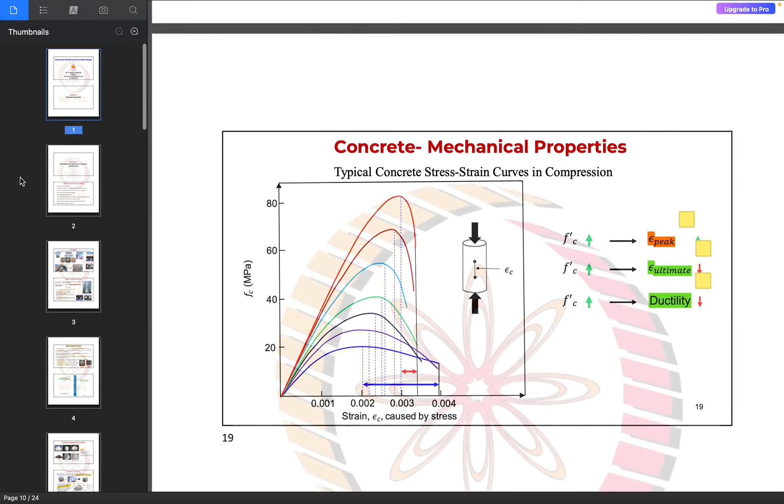So without further delay, let us start with the summary of the lecture. Whenever there is any doubt, please feel free to unmute yourself and discuss it with me. So we are starting with part 1 of the module. I hope that my screen is visible now.

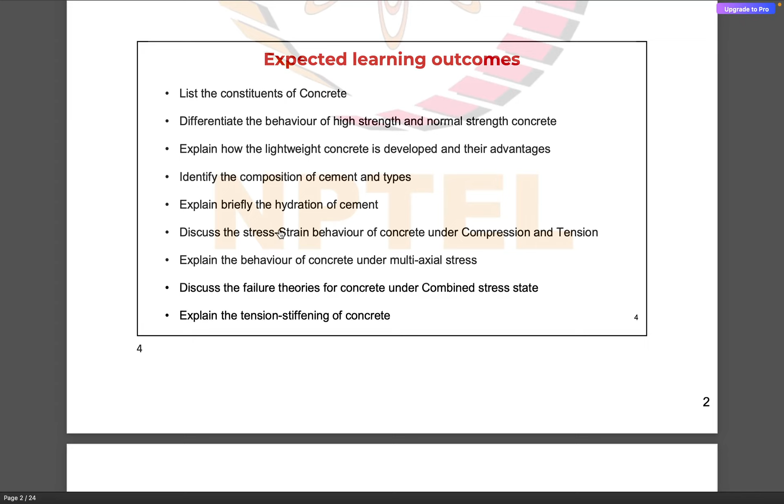Then we discussed the various failure theories for concrete under combined states of stress, and the concept of tension stiffening in concrete.

We'll start from the very basics, where concrete is made up of different constituents. We have the cement, which provides the binding properties. Then we have the aggregates, which provide the strength, and water, which also provides binding and is important for the workability of concrete. Then we have different types of admixtures which help enhance the properties of both fresh and hardened concrete.

In multi-story structures we use high strength concrete, and as per IS 456, concrete having a strength of 65 to 100 megapascal is classified as high strength concrete.

Then we looked into the concept of Abrams' law, which states that as the water to cement ratio reduces, the compressive strength of concrete increases.

Superplasticizers have been used to improve the workability of concrete. Then mineral admixtures such as fly ash and silica fumes are added to concrete in order to improve the compressive strength.

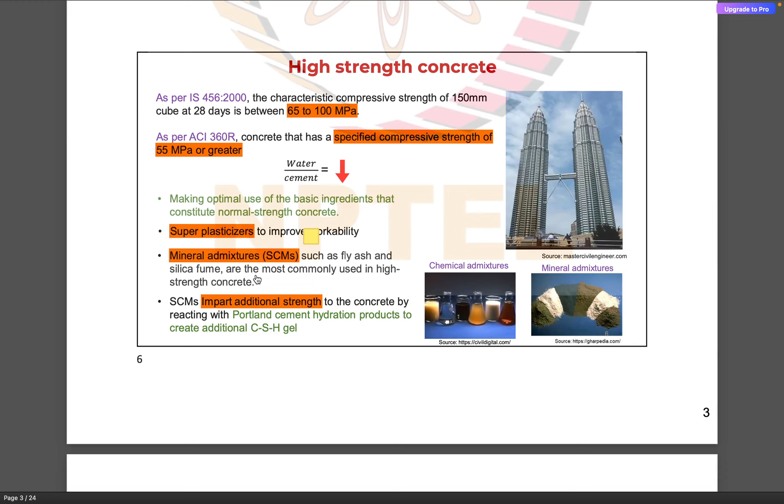Then we looked at lightweight concrete. Since aggregates make up a significant weight of the concrete, by replacing the heavy aggregates with lightweight artificial aggregates, we can enhance the workability of concrete and produce an efficient structural design, because it can significantly reduce the dead loads coming upon the structure.

Based on the ACI provisions, we looked into 3 categories of concrete depending on the densities that they possess. Further, we have the Indian standard codes and the ACI codes which are necessary to prepare lightweight concrete.

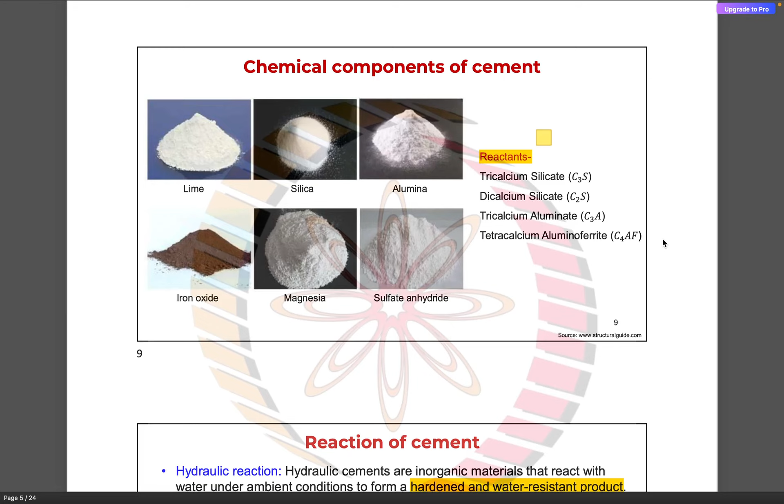Then we have some of the chemical components that make up cement, such as lime, silica, alumina and iron oxide. These are the 4 primary reactants: tricalcium silicate, dicalcium silicate, tricalcium aluminate, and tetracalcium aluminoferrite. These react with water to develop the C-S-H gels, which are responsible for the compressive strength of concrete.

Then we have the hydraulic reaction, and we looked into how an isolated cement particle, when it comes into contact with water, undergoes the process of hydration, followed by hardening of concrete.

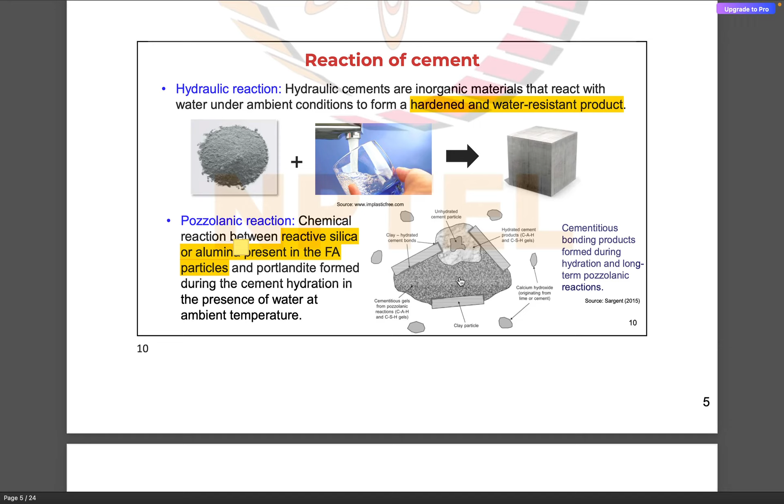Further, we looked into how the different reactants react with water in the process of strength development. For example, we have C3A and C3S, which are responsible for the high early strength, and C2S and C4AF, which are responsible for the late strength.

Then we have the different types of cement, classified essentially based on the compressive strength of the cement mortar cubes, and 53 grade cement is the most prevalent and widely used in the field.

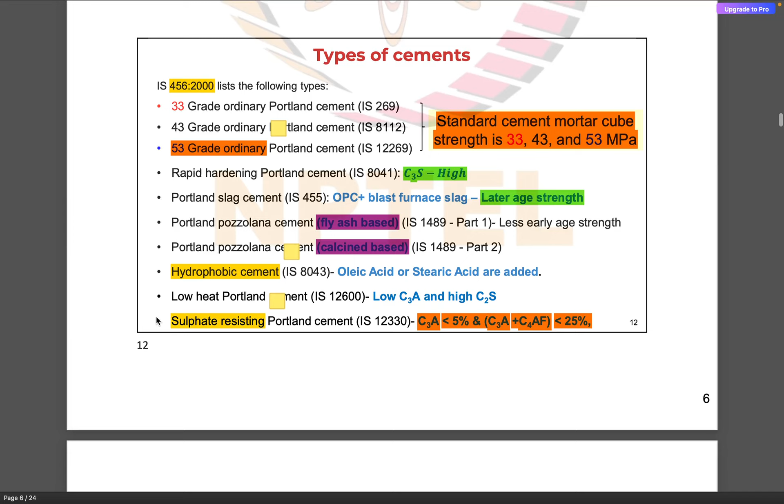We also looked at certain special types of cement such as hydrophobic cement, and sulfate resisting cement, which are used in special circumstances where the project requires us to use them.

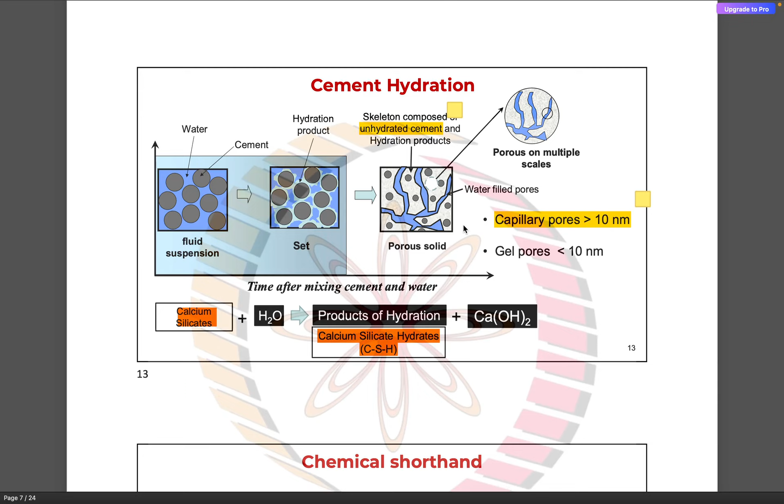Further, we looked into the process of cement hydration, and how the capillary pores and gel pores are formed. It is important to prevent interconnectivity between capillary pores so that concrete is not permeable, because permeable concrete is highly vulnerable to corrosion from water seeping in, which can react with the steel rebars and result in corrosion and subsequent strength degradation of reinforced concrete structures. Then we looked at some of the chemical shorthands.

Then we looked into the process of hydration of cement.

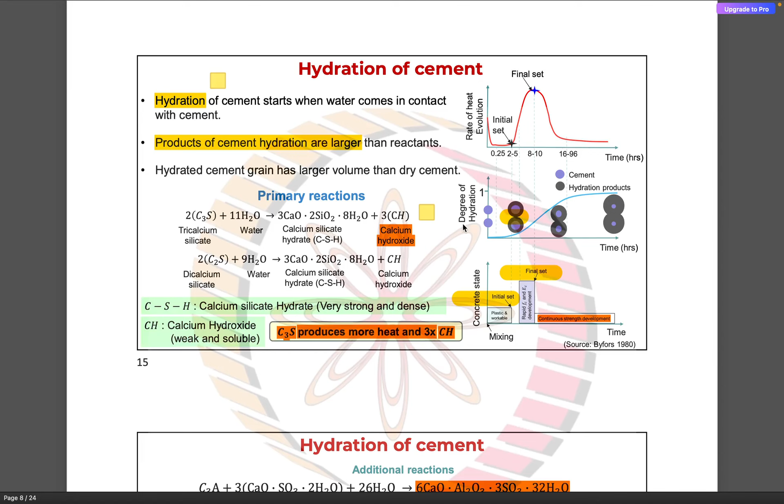Further, we looked into what is known as ettringite formation. Ettringite is a chemical product of hydration. We want ettringite to form at the earlier stages of hydration, because delayed formation leads to needle-like structures. This causes expansion of concrete, which leads to cracking within the structure, allowing water to seep in, causing corrosion of steel, and subsequently strength and stiffness degradation of the structures.

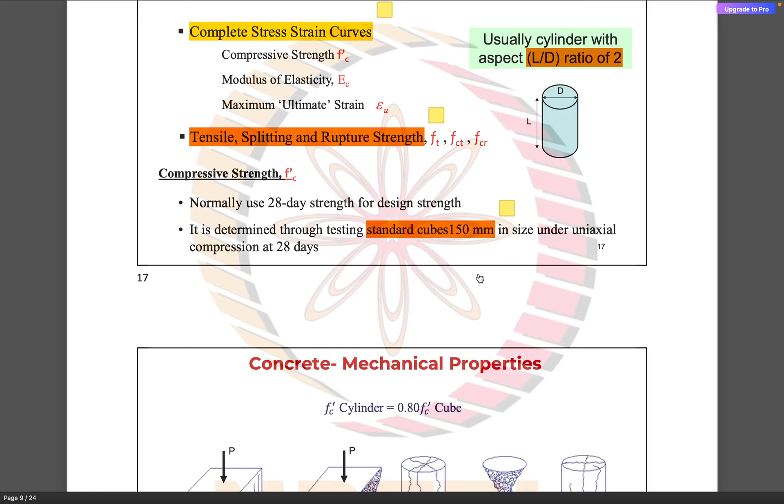Then we looked at the evaluation of the mechanical properties, firstly the stress strain curves. We saw that we need to test concrete cylinders to obtain the most realistic estimate of the stress strain behavior of concrete. However, for practical purposes, as per IS codes, we use cubes of 150mm size purely for practicality, and these need to be converted to cylinder strength in order to truly understand their behavior in real structures.

So then we looked at the mechanical properties between the concrete cube and the concrete cylinder.

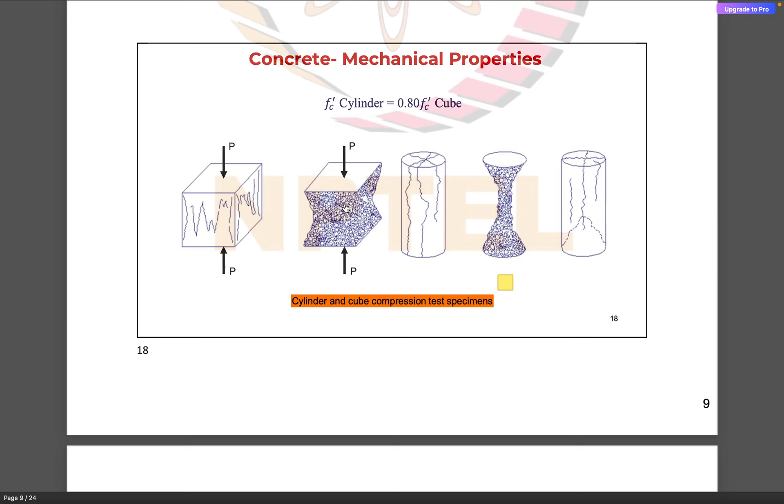Then we looked at the variation in compressive behavior when we change the grade of concrete. As you can see from the stress strain behavior, the concrete with the least compressive strength has lesser peak strength but higher ultimate strain. So what we're trying to show is that as compressive strength increases, the peak strain increases, but the ultimate strain decreases.

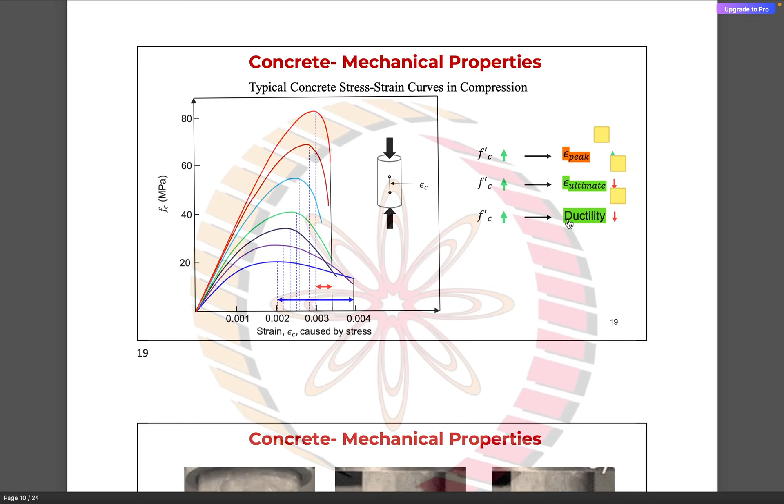Subsequently, the ductility of concrete, measured as the difference between the ultimate strain and the peak strain, also reduces as we increase the grade of concrete. We looked at an animation where high strength concrete tends to develop a brittle failure.

Then we looked at the mechanical properties of concrete, which lies between the mechanical properties of hardened cement paste and the coarse aggregate. I hope all of you are with me.

Hello. Yes sir. Yeah, yes, yes. I've been talking for about 15 minutes, so I just wanted to make sure. Please feel free to interrupt in between so that we can have a discussion if need arises.

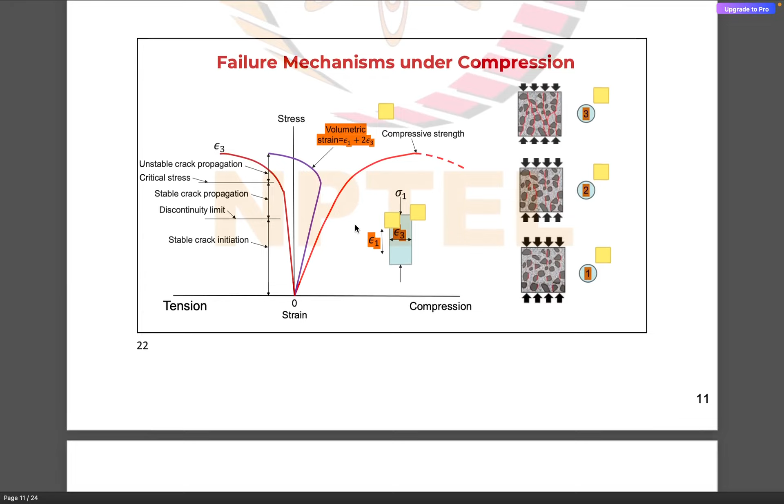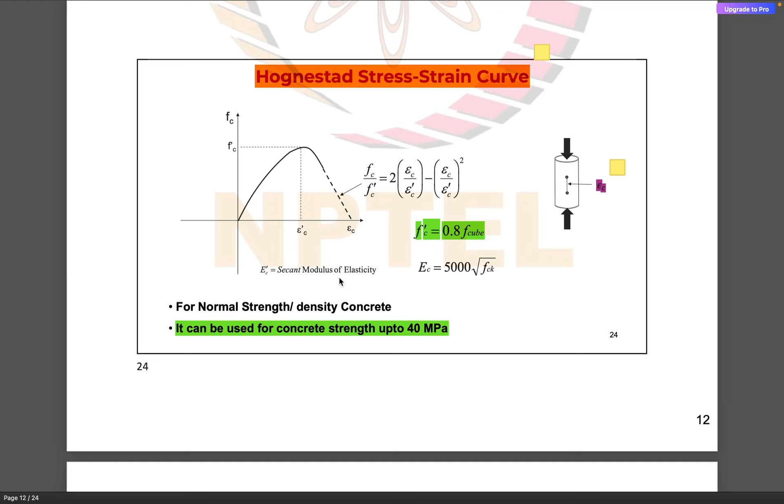Then we looked into the mechanical properties. The IS code prescribes an ultimate strain of 0.0035 and a peak strain of 0.002, and then we need to calculate the stress corresponding to a given strain, because these are important for our numerical calculations.

The stress strain curve of normal strength concrete tends to follow this parabolic law, or the Hognestad stress strain curve.

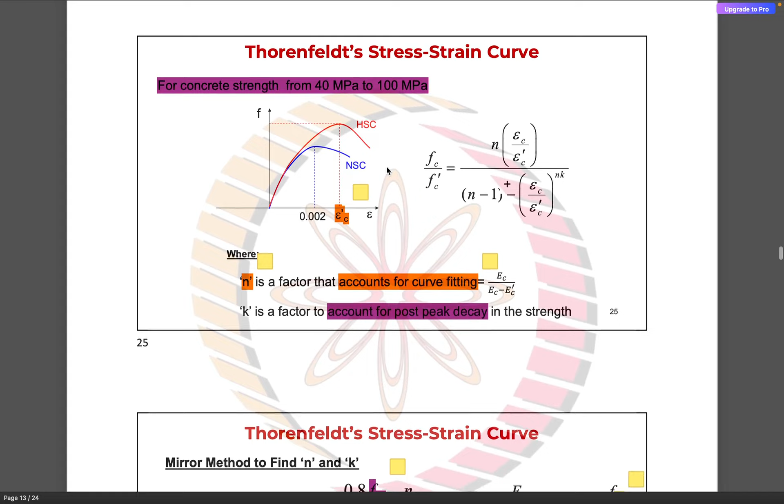Similarly, for high strength concrete, since the stress strain behavior is quite different from normal strength concrete, we have the Thorenfeldt stress strain curve, which involves more involved calculations with factors n and k. The factor n represents the variation of the slope as we move from the elastic to the non-elastic part, and the constant k represents the post-peak strength degradation. We will be solving some numericals based on these two concepts later in our interaction session today.

And then we saw that as the rate of loading increases, the compressive strength of concrete also increases.

Further, we looked into the characteristic strength, which we also covered in our previous week, which is: not more than 5% of the test results should be less than this value.

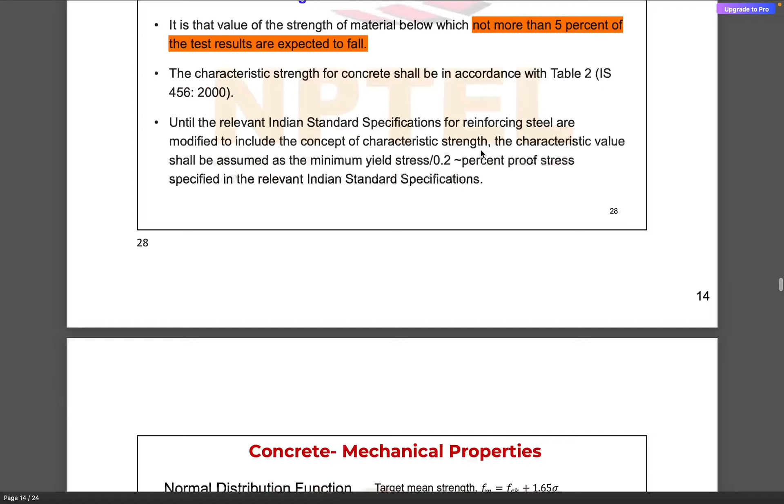So then, in order to evaluate the target mean strength, we use this expression where the target mean strength is given by the characteristic strength plus 1.65 times the standard deviation. This standard deviation, as we looked into in the previous class, is based on the IS code. For different grades of concrete, we assume different values of standard deviation, and accordingly when preparing the concrete mix, we can prepare for a given target mean strength based on the grade of concrete required for the project.

We have the characteristic stress strain curve versus the design stress strain curve. For the characteristic curve, we use factors of 0.85, which corresponds to the size effect, and 0.8, which corresponds to the conversion between concrete cube strength and concrete cylinder strength. To develop the design curve, we further divide by a partial safety factor of 1.5, which leads us to the design compressive stress of 0.447 FCK. So for concrete of M30, the design compressive stress is 0.447 times 30.

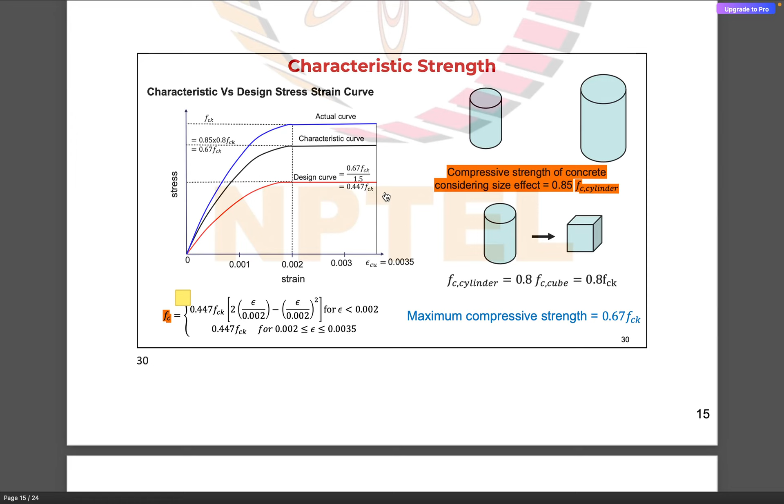So moving forward, we have the tensile strength.

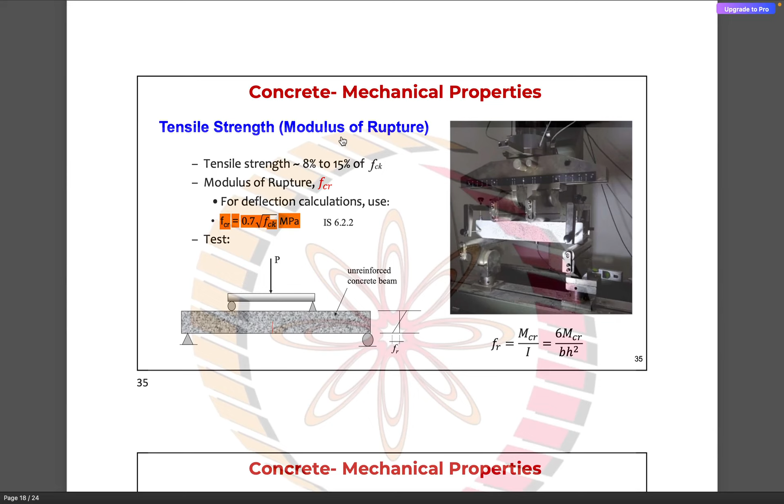Moving forward, we looked into the concept of tension stiffening. We have a question on this too. Essentially, at the location of a crack, the loads are entirely taken up by the reinforcing steel. However, in between the cracks, concrete takes up a part of the tension because of the bond existing between concrete and reinforcing steel, giving a stiffening effect as concrete helps resist tensile loads.

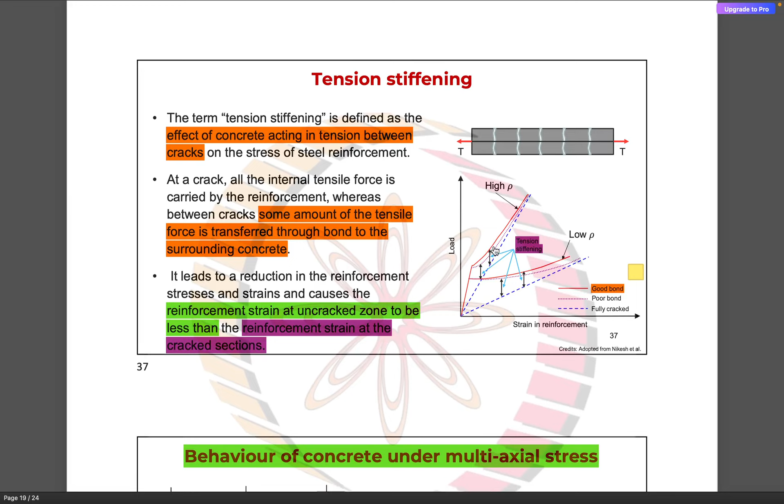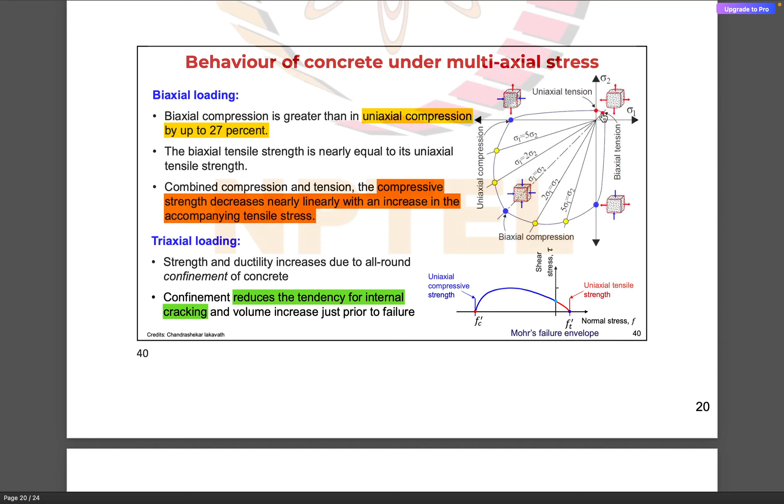This is a nice representation depicting how the behavior of concrete changes when going from uniaxial to biaxial loading. This is the uniaxial compression test, and this is the biaxial compression test. This represents the uniaxial tension test, and this represents the biaxial tension test.

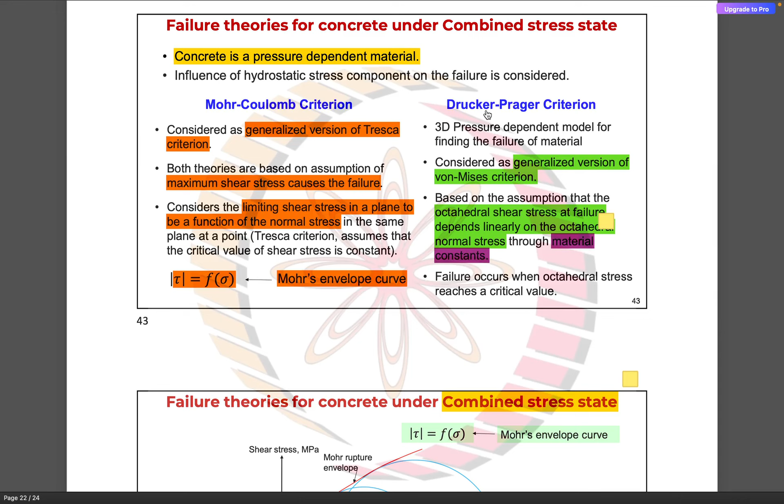We looked into different failure theories. For ductile materials, we have the Tresca and von Mises yield criteria, representing the behavior of ductile and metallic substances. However, since concrete is a brittle or quasi-brittle material, a modification of the Tresca criterion has been adopted as the Mohr-Coulomb criterion, and a generalized version of the von Mises criterion is adopted as the Drucker-Prager criterion. These are the failure envelopes.

So this was the first part of the module. Then we will go ahead with the second part.

Excuse me, sir, I have a question regarding the first part of this module, regarding hydration of cement. I want to know what is the effect of temperature on hydration of cement, and as a designer, what should we be aware of while designing a structure located in a heavy snow area where mass concreting is going to happen during the winter season.

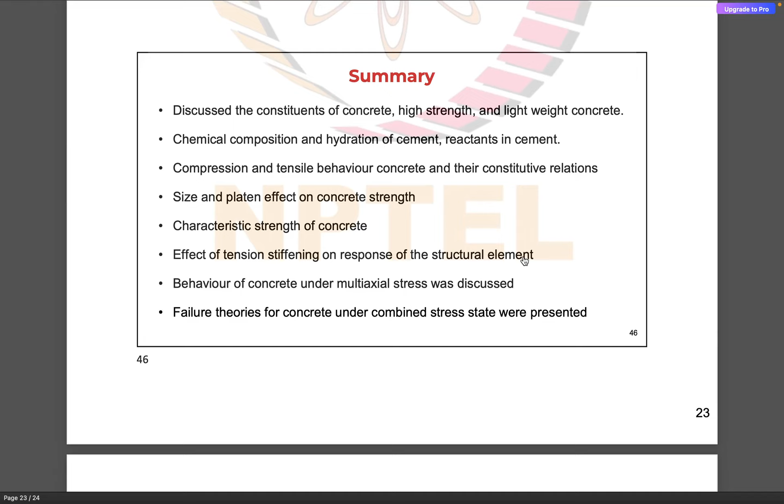If it is in a heavily snowing area, curing of concrete becomes difficult because it is important to maintain a certain temperature. At sub-zero temperatures water exists as ice, and at higher temperatures that is not desirable. So we can look at alternative methods such as precast construction, where structural components such as beams and walls can be cast in a controlled environment. That is one way of tackling the problem of extreme temperatures.

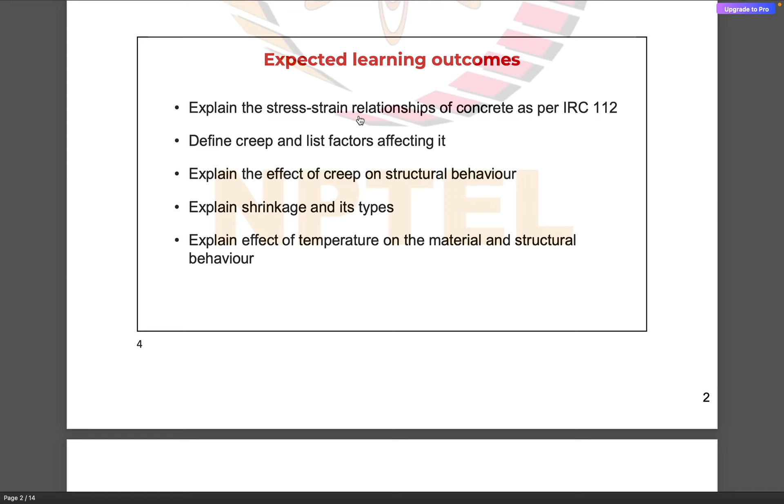Quickly we will go through the second part of the module, which corresponds to the long-term properties of concrete. In the initial part, we looked into the stress-strain relationship of concrete as per IRC 112, based on which bridges are designed. Then we looked into the concept of creep and the factors affecting it, followed by the effect of creep on structural behavior. Then we looked into shrinkage and its types, and the effect of temperature on material and structural behavior. These are essentially the properties.

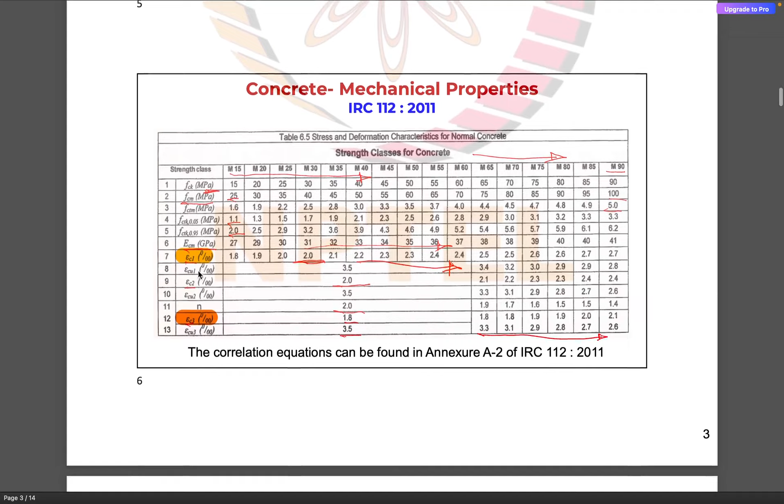I would recommend that you look into the codes, because me going into the specifics will not be much productive for you right now. However, I would like you to pay attention to the different properties that have been identified, and we will be looking at some of these properties in the questions that I framed also.

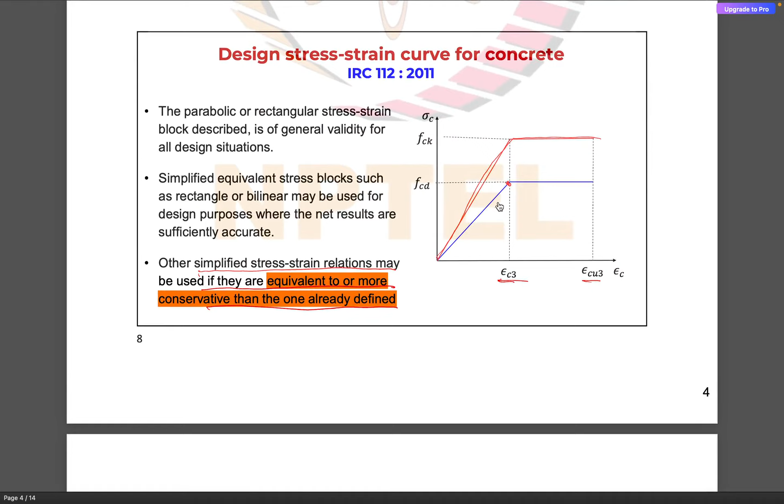So as we saw previously, the stress strain curve tends to follow a parabolic profile. It can be approximated into a triangular profile for ease of calculations.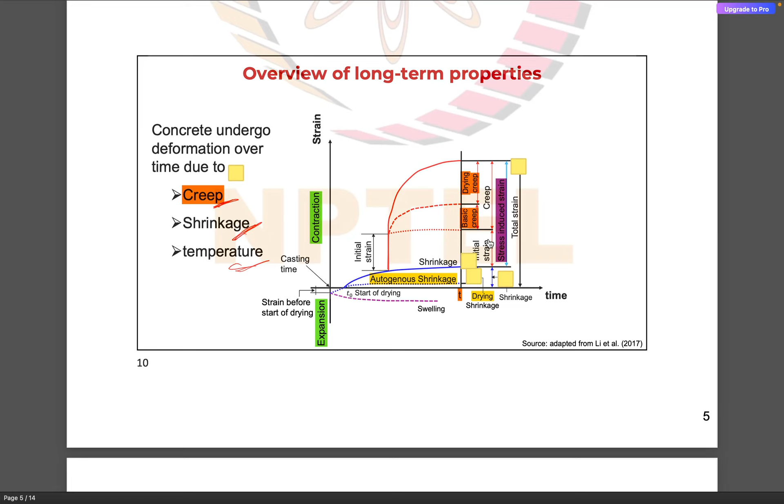So once the load starts to act on the structure, there are strains due to the creep. So we have the creep due to loading. We will be discussing more about this in a question in a few minutes.

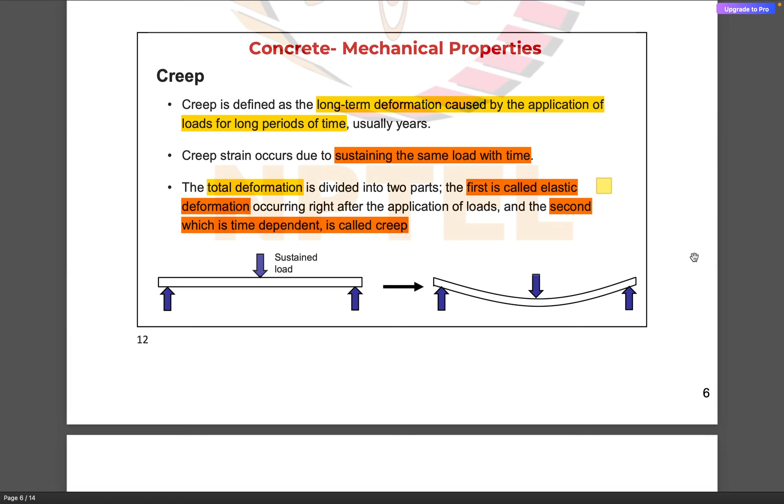Then we have the long-term properties. Creep is essentially defined as the deflection that is caused in the structure due to the application of loads for a long period of time, that is, load that is being sustained over a period of time. The first component is called the elastic deformation, caused due to the loading, but when it is sustained over a period of time, we have the phenomenon of creep.

So we have the progress of creep with time. Then we have some of the properties affecting creep. We see that steam curing helps in reducing the creep. The high strength concrete, which is generally associated with a low water cement ratio, has a lower creep.

Further, creep is facilitated with higher temperatures. When there is high humidity in the environment, there is already sufficient water vapor in the environment, so there is less creep.

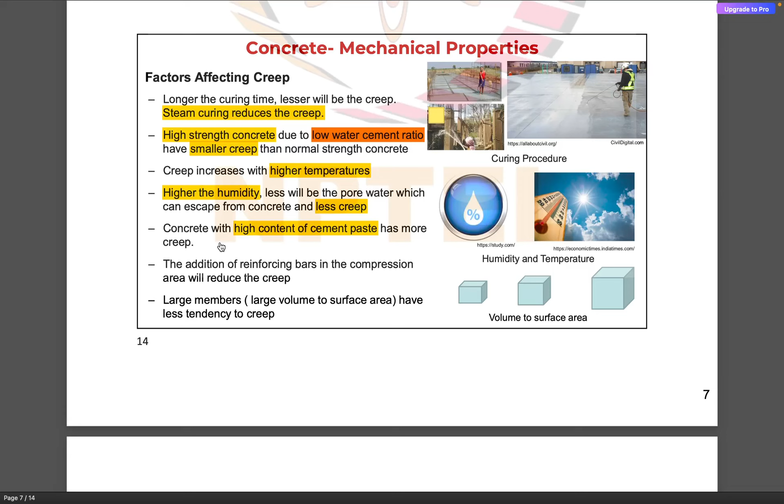Then we see that the high content of cement paste is also associated with a high amount of creep.

Moving forward, we have shrinkage. Shrinkage is defined as the reduction in the volume of concrete because of the loss of moisture, and we see that whenever there are restraints, it tends to form cracks because of the change in volume. If there are no restraints, however, there is no issue of cracking.

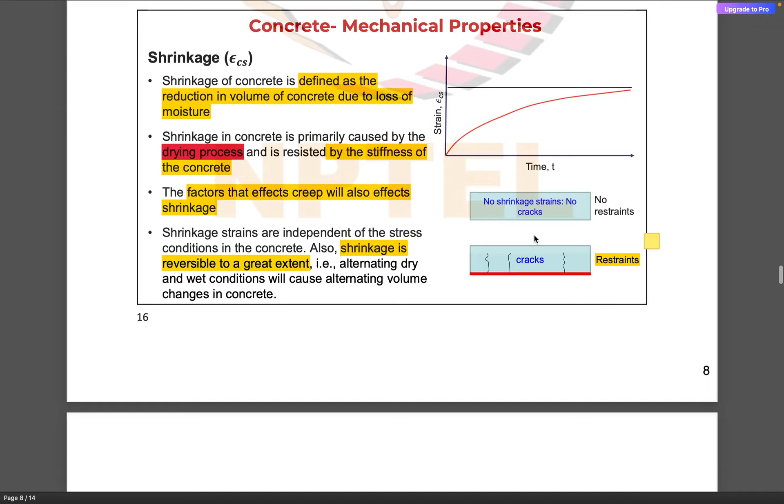So similar to the creep, we factor into the design the shrinkage strain. Further, we have different types of shrinkage: drying shrinkage, autogenous shrinkage, and what is known as carbonation shrinkage, which involves the interaction of the products of hydration along with the carbon dioxide present in the atmosphere, that ultimately leads to shrinkage in the concrete.

So these are the different parameters which affect the process of shrinkage. A specimen that is stored in water does not undergo shrinkage. However, when it is subjected to air, depending on the moisture and temperature, the shrinkage can vary.

Then it is very important to perform the curing of concrete in order to avoid the process of shrinkage. This is the comparison between specimens with no water curing and curing for 7 days and so on.

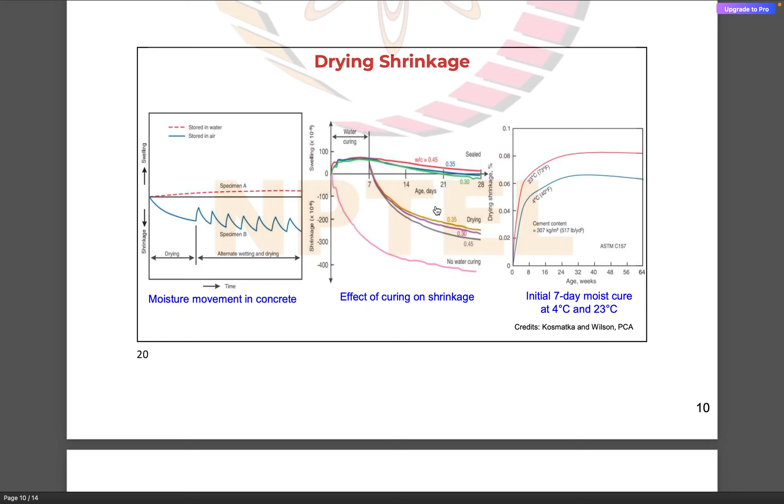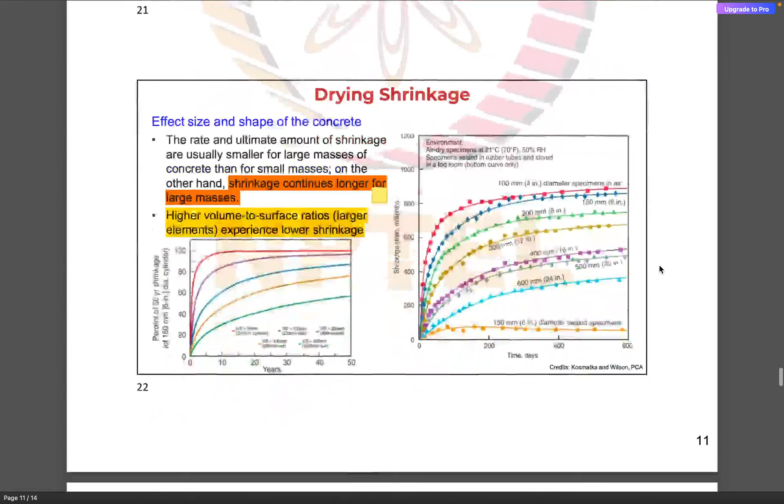Then the temperature for the curing is also important and plays an important role in the subsequent shrinkage of concrete. We have some more properties responsible for the drying shrinkage, such as the reinforcement, then the volume to surface ratio. We will be solving some problems based on this.

Then we have the plastic shrinkage, which occurs in the fresh state of concrete. Then we have the carbonation shrinkage. Moving forward, we'll look into the third part of the module.

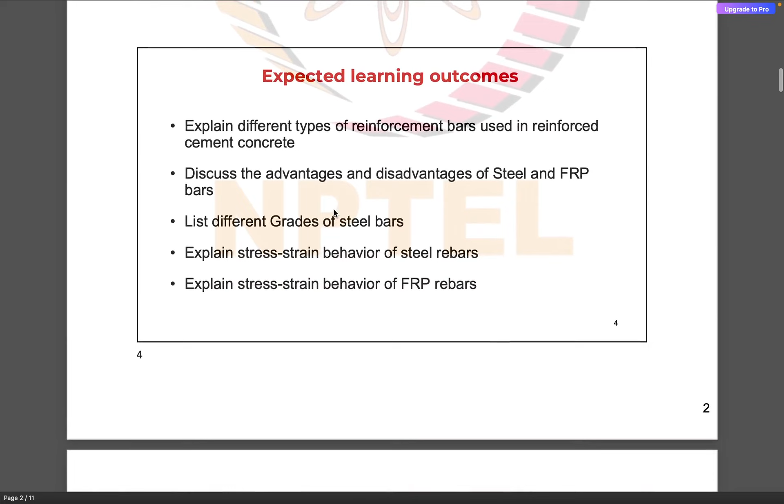In this part of the module, we look into the tensile properties of reinforcing steel, the different types of reinforcing bars, the advantages and disadvantages of steel and FRP rebars, the different grades of steel rebars, followed by the stress strain behavior of steel and FRP rebars.

As we have seen earlier, the tensile strength of concrete is approximately 10% of the compressive strength, which is why the requirement of reinforcement arises. So we have the different grades of concrete.

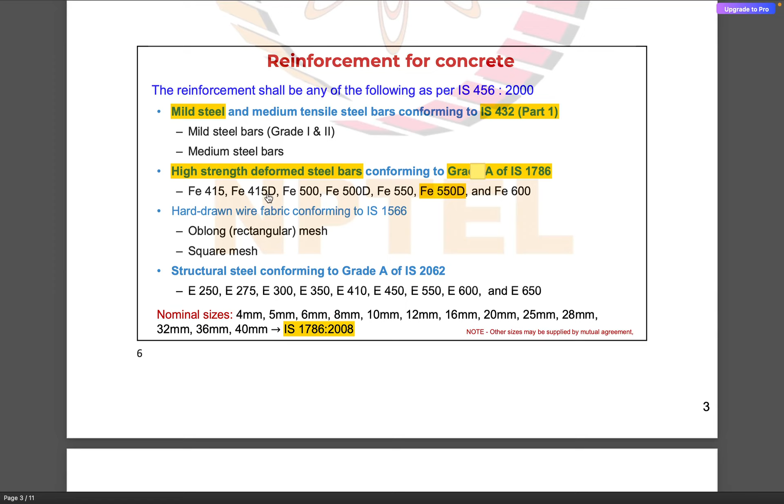We have the mild steel bars, which is of Fe250 grade. We have the high strength deformed, or the HYSD bars, of different grades, and the letter D stands for ductile, because whenever we are using steel in seismic areas, we need to design the structural members to behave in a ductile manner.

Ductile behavior of steel is essential to safeguard structures during earthquakes and seismic loading conditions. The IS 1786 is the governing code for the reinforcing steel.

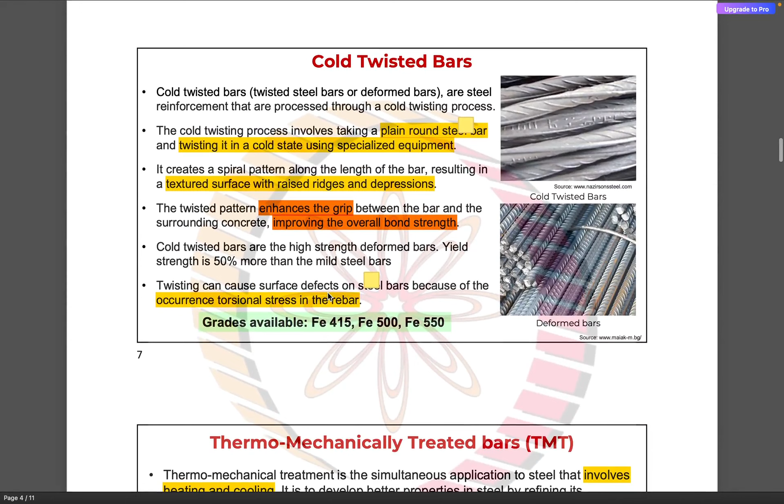Then we have the cold twisted bars and the deformed bars. Then we have the thermomechanically treated bars, which involve the following three steps of heat treatment, and consist of a tough outer case and a soft inner core, with the strength essentially an outcome of the ferrite pearlite structure formed due to the process of treatment.

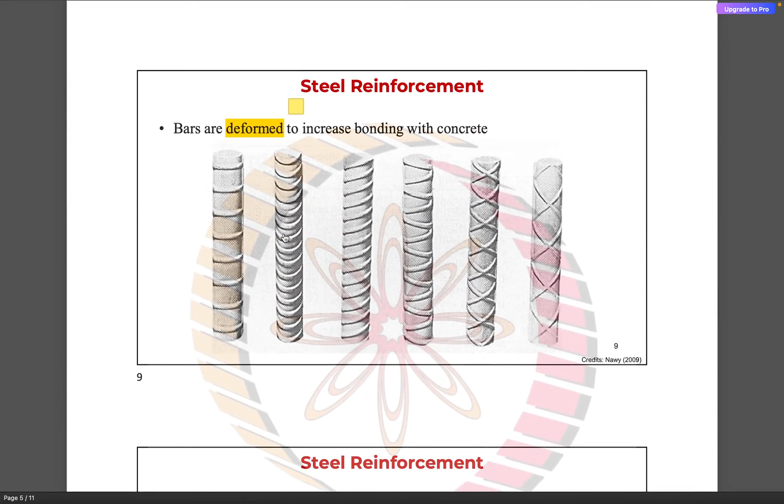So it is deformed into different configurations in order to ensure a better bond with the surrounding concrete.

Moving forward, we look again at the difference between the characteristic strength and the design strength of concrete. Usually we use a partial safety factor of 1.5 for concrete. However, for steel, since it is manufactured in a controlled environment, we use a lower factor of safety, which is 1.15.

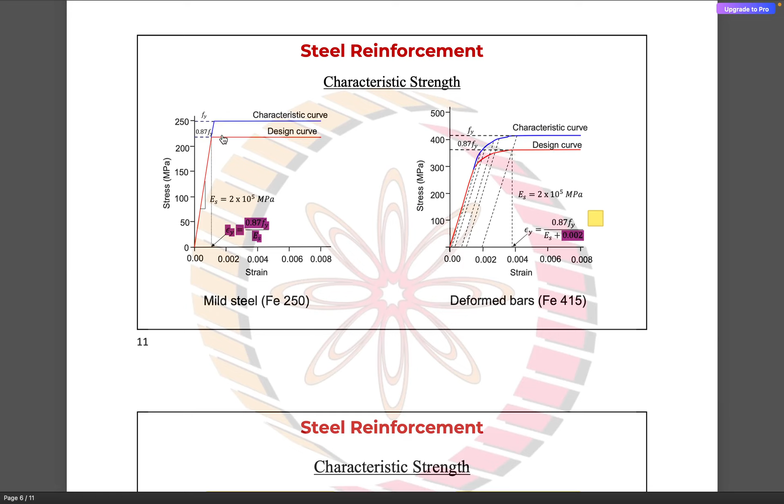So the design stress is usually reduced by a factor of just 1.15. Moving forward,

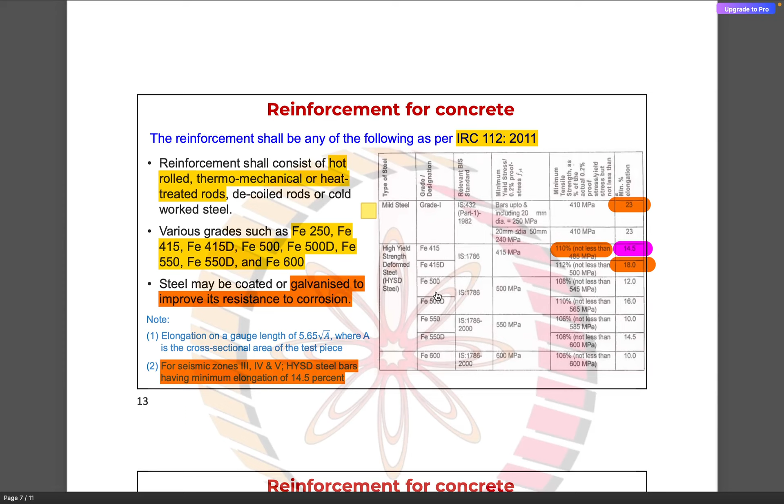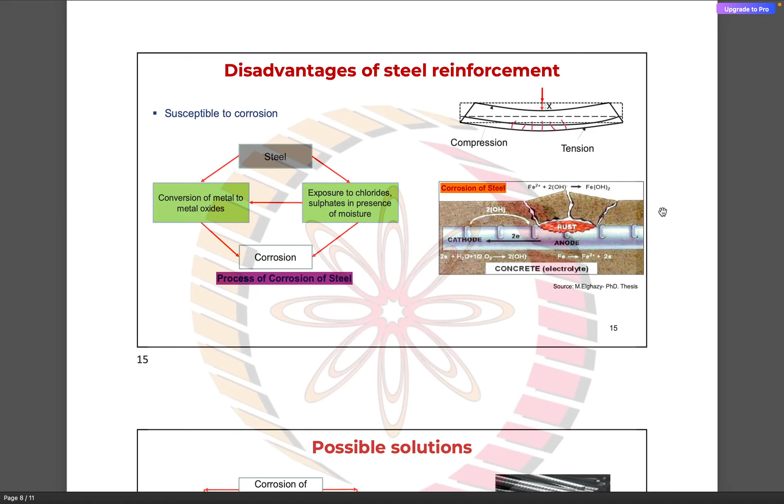One of the major drawbacks of steel reinforcement is that it is highly susceptible to corrosion. Whenever there is moisture, it tends to react with the OH ions to form rust and other products of corrosion, which leads to strength degradation over a period of time. So it is very essential to ensure that the concrete we are preparing is impervious to water.

So in order to avoid the problem of corrosion, we have introduced galvanized steel, and we have epoxy coated steel, which can prevent the process of corrosion in case there is ingress of water.

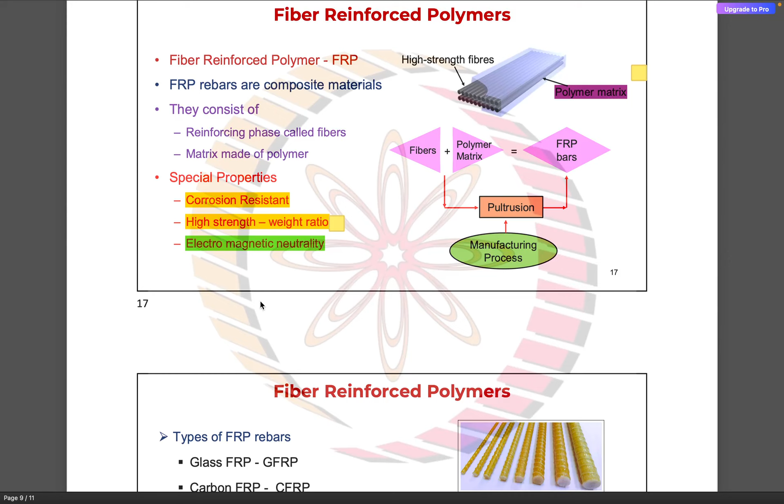Then we also have the FRP rebars, which have excellent strength to weight ratio. These are embedded in matrices, and they provide excellent strength, almost comparable to, and even higher than, that of reinforcing steel.

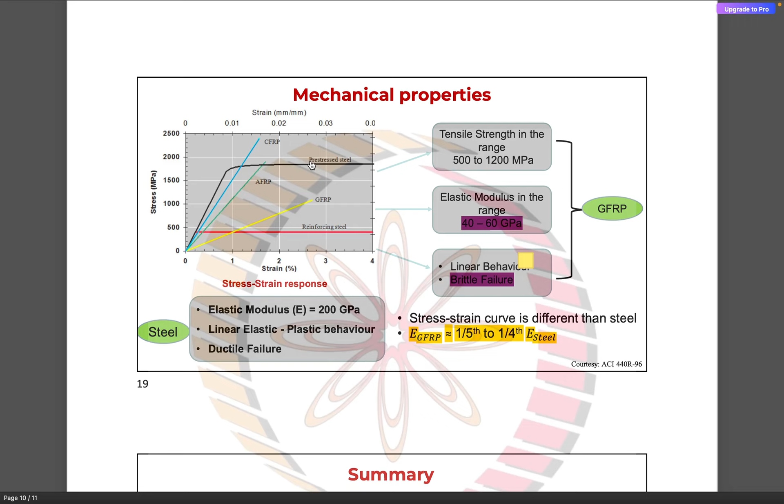However, the major issue is that the stiffness is quite lesser when compared to the steel rebars, and they do not show a ductile behavior, because reinforcing steel and pre-stressing steel, before failure, give us adequate warning in the form of high elongations. But for FRP bars, it just reaches its ultimate load and then ruptures.

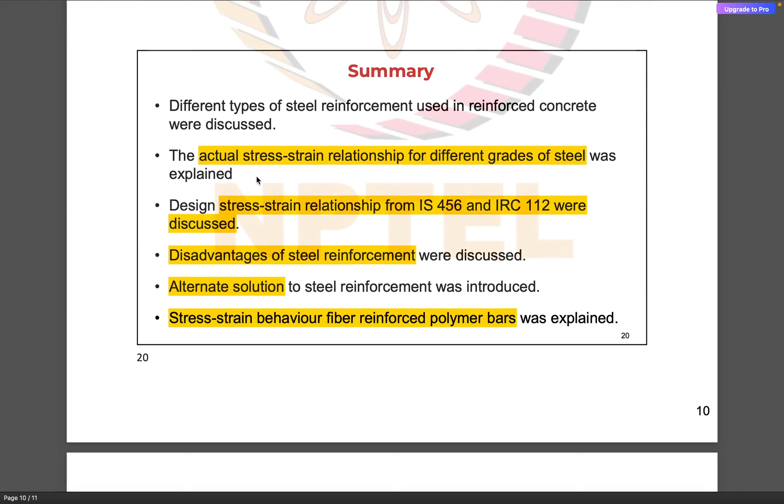So it is important to design with considerable care and caution, and also the stiffness is lesser when compared to the steel rebars. With this I will conclude the summary of this lecture slides. I welcome any questions if there are any.

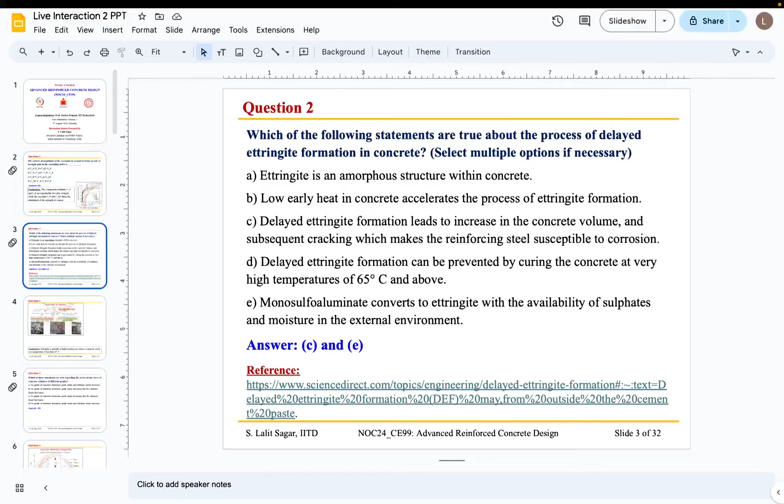So as the participants said, C and E, sir. Yes, option C and E are the right options. So may I know who gave the answers? One was given by me, Vikram. Okay, thank you. The second was by me. Yes, thank you for the answers.

So Ettringite is... I will forward this link to a research article which helps you better understand Ettringite formation. It's a major issue with respect to concrete. I am sure if you're working in the industry, you might have some experience with the cracking, and the cracking is attributed to the process of delayed Ettringite formation in concrete, which is why the topic is of considerable interest in research as well.

As we can see, when there is hydration of cement in concrete, it leads to the formation of Ettringite, which is essentially this compound. However, when there is high heat, the Ettringite becomes unstable and tends to form this calcium monosulfoaluminate. Later, when moisture and sulfate become available, the calcium monosulfoaluminate tends to convert back into Ettringite, and this Ettringite, as you can see from this microscopic image, is a needle-like structure that leads to significant expansion within concrete.

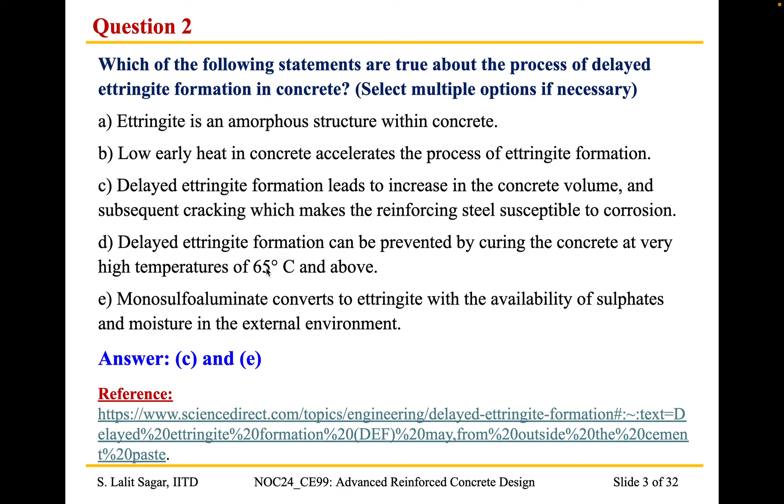And the expansion leads to the formation of cracks, which is why the process of delayed Ettringite formation is highly undesirable. Statement A is incorrect because it is a needle-like crystalline structure. High early heat accelerates the process of Ettringite formation, so we need to maintain a curing temperature of 65 degrees and below in order to avoid this phenomenon. The statements C and E are absolutely right.

So moving forward, we have question number 3. Which of these statements are true regarding the stress strain curve of concrete cylinders of different grades?

Option B. Option D, is it D for Delhi? Yes, D. Okay, thank you for your answers.

So as some of you have pointed out, let's move forward. As you mentioned, the correct answer is option B. So let us look at the explanation.

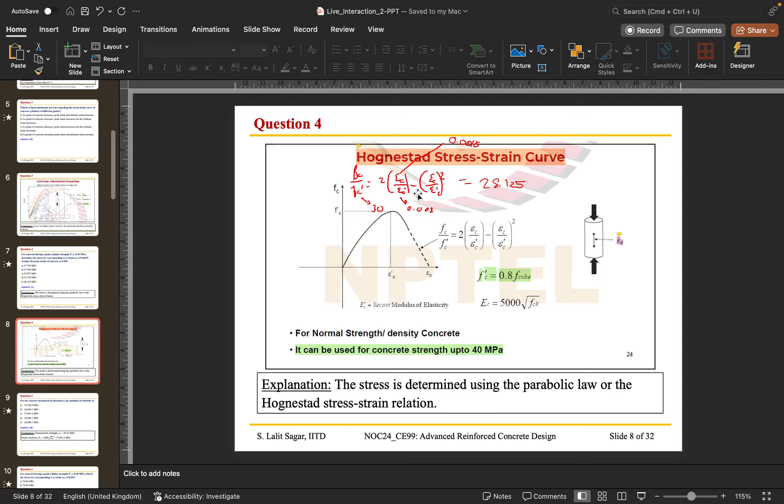So when you plug the values into this particular equation, we get option D, that is 28.125. Okay, I hope it is clear. Yes, sir. Yes, okay.

So moving on, we will go to the next question. For the concrete that is mentioned in question 4, what would be the modulus of elasticity?

This is quite straightforward. You can take 2 minutes for this question.

So please repeat question 4. I hope you can see the screen. Question 4, so just for the data, I'll help you with the data. Concrete cylinder strength is 30 MPa, and that is the only data that you require to determine the modulus of elasticity.

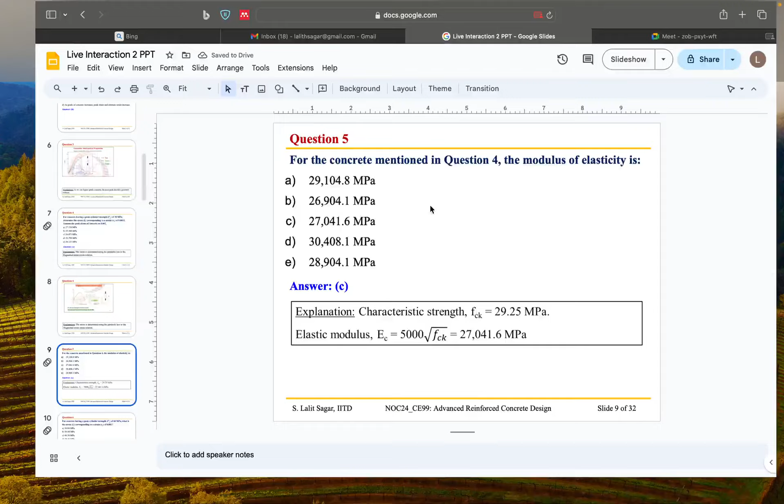Okay, so I think there is a mistake. The correct answer has to be option C. Okay, so we will solve the problem now. I think one or two of you had answered option C. Option C is the right answer. So let us look at how we are going to solve it, right? Okay, so if there is any doubt, we can solve it over here.

Okay, so we saw that f prime c is given as 30 MPa, and what would be the modulus of elasticity of concrete? What is the equation? Modulus of elasticity is given by 5000 square root of FCK. Yes, so it all comes down to finding out the value of FCK.

So we have seen in one of the lectures that this is basically the cylinder strength. So what we need to determine the value of FCK is the cube strength. That is represented by FCU, and that is given by f prime c into 1.25. Okay, all of you are with me? So this gives a value of 37.5, right?

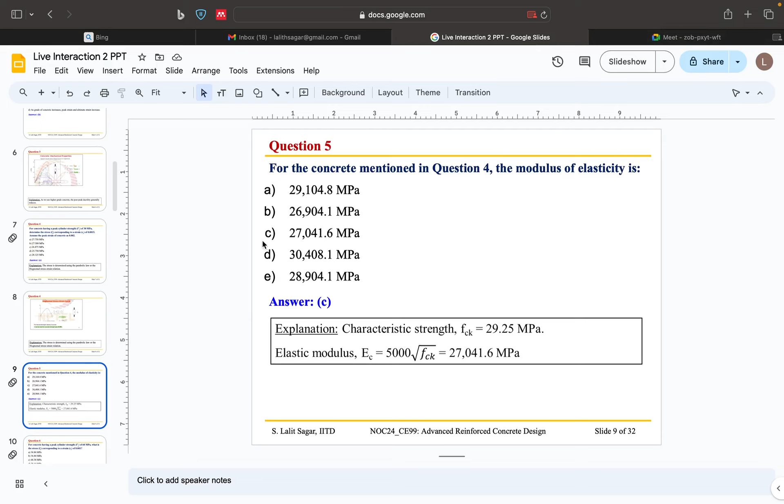Okay, so we have another numerical question, and this is based on the Thorenfeldt equation, just to save you time. I suggest you calculate and let me know the answer. For a peak cylinder strength of 60 MPa corresponding to a strain of 0.001, what would be the corresponding stress? The hint is kindly use the Thorenfeldt relation in order to determine the value of stress Fc.

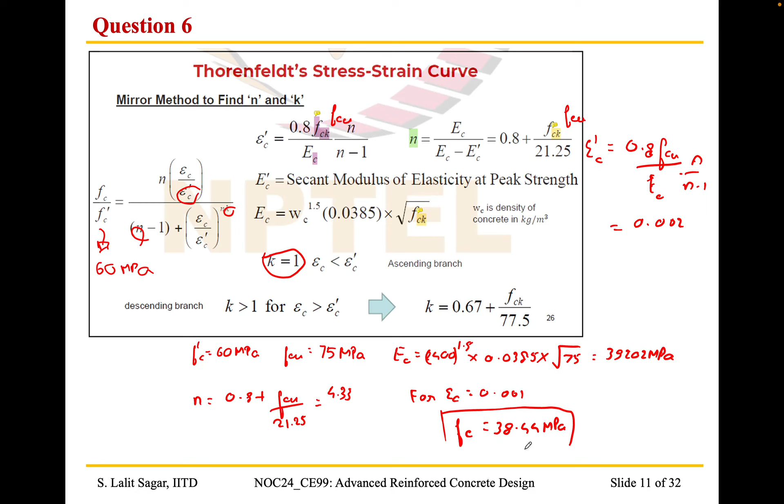Okay, so moving forward, please interrupt me if there are any questions. We can take a bit extra time if you are not able to complete. Since this was a large module, I framed a number of questions. Again, I would like to highlight that the main objective of framing this interaction session is two points.

First point is that it will help you to revise all the concepts, and it will help you to apply the numerical problems. I hope you're gaining something out of this session. So we can go forward.

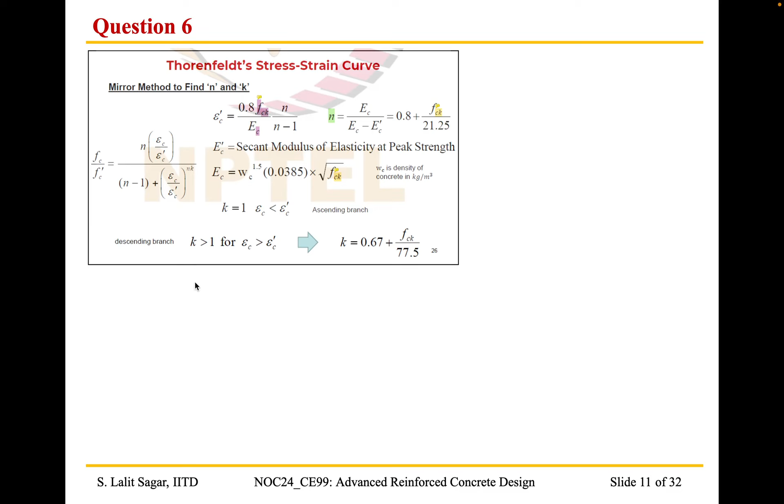So the modulus of elasticity we have calculated. Has anybody noted down the value of modulus of elasticity? Hello? 38.44 — sorry, which option? Oh, that was the value of FC, not modulus of elasticity. So the modulus of elasticity was option C, 39202. Okay, so using this equation we obtained the value of modulus of elasticity.

Okay, another simple straightforward question. We already discussed this in class earlier today. Anybody would like to refresh and answer the question? Option D, 38.5. Yes, that's absolutely right. Okay, moving to the next question.

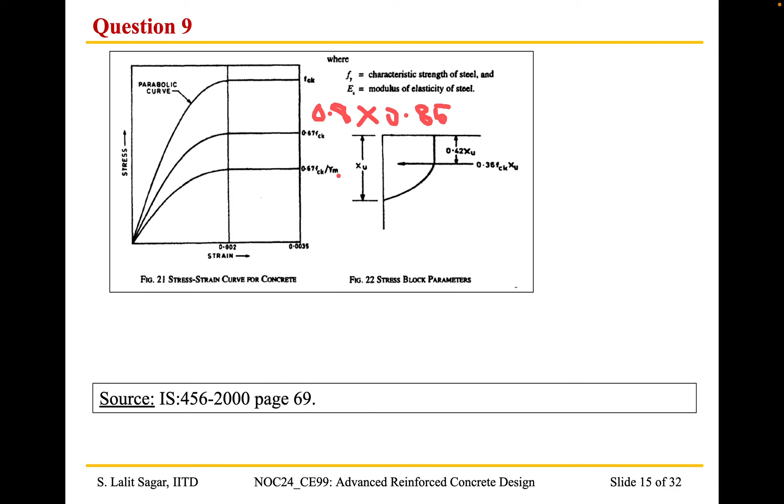We are going to reduce this by a factor of 0.67. That factor comes from one of the earlier slides we discussed: 0.8 into 0.85 gives us 0.67. Then when you divide that by the partial safety factor, we obtain the value of 0.447. 0.447 into 40 gives us the value of 17.87. Okay, moving forward.

So again we have a numerical. An M40 concrete prism of 100 mm square cross section is subjected to 4-point bending stress. If the maximum bending moment at failure is 1 kilonewton meter, what is the corresponding flexural stress? Compare it with the modulus of rupture. You can take 2 minutes.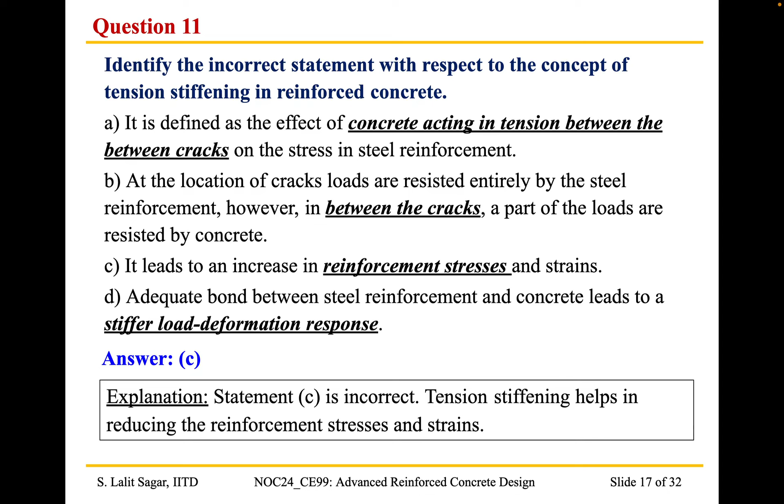So the rest of the options are correct. The concrete acts in tension between the cracks, and in between the cracks a part of the loads are resisted by the concrete, leading to a decrease in the reinforcement strains and stresses, and an adequate bond between the steel rebars and the concrete leads to a stiffer load deformation response. So this is what we are looking at: the location where the concrete member is cracked, and this is the stiffening effect provided by the concrete between the cracks and the uncracked region.

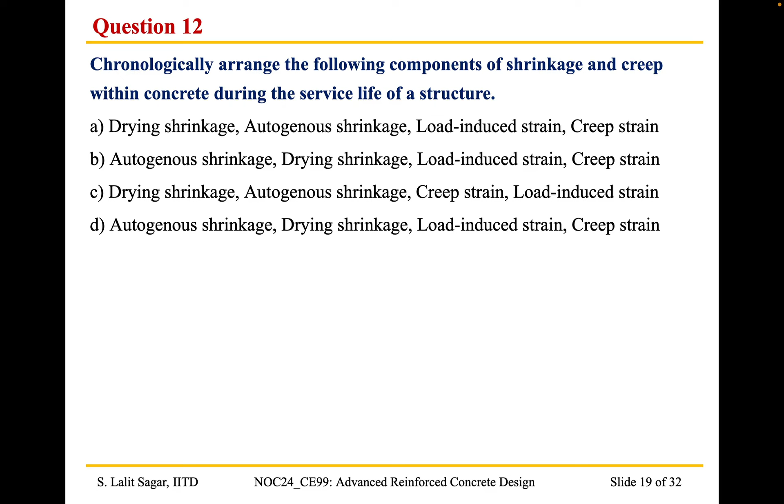Option C, sir. Okay, I think it is option A. B and D, sir, B and D are the same which is given. Oh okay, I think there is a small mistake, yeah, B and D are the same. So you can still answer, choosing between A, B, and C. B and D, sir, B and D. Okay, so the correct answer, as you pointed out, is B and D.

Because as soon as hydration starts happening, there is autogenous shrinkage due to the reaction between the chemical components and the water. Then there is drying shrinkage, followed by the load induced strains, followed by the creep strains, because the creep strains are due to the sustained loading over a long period of time. Okay, moving to the next question.

Identify the correct statement with respect to the concepts of creep and shrinkage. Here you can select multiple options if necessary. Sir, can you show the previous graph once again? Yes, thank you.

So this is available in the lecture slides. You can go back to the lecture on long-term properties for better clarity.

Initially there is autogenous shrinkage, which is due to the process of hydration, followed by drying shrinkage because of the drying of concrete structural members. Then this point T corresponds to the point of load application, so you have this initial strain, which is load-induced strain. Then we have the creep-induced strains: basic creep and drying creep. The stress is a combination of initial loads and then the creep loads.

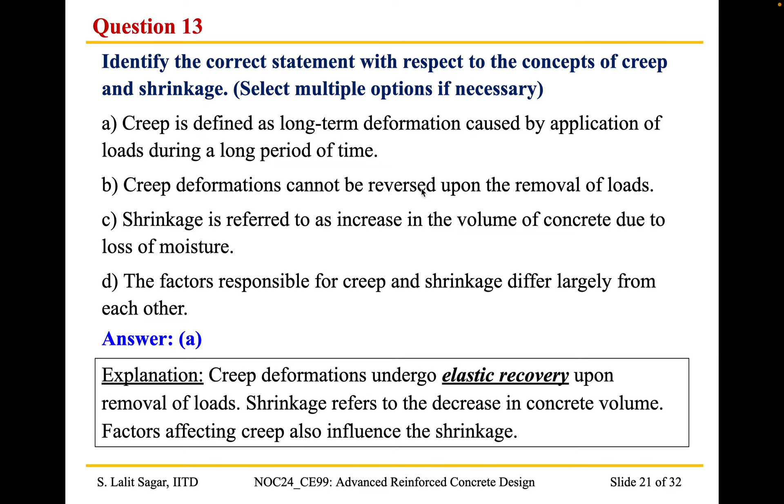The explanation is that option B is incorrect. Option A is correct because it is referred to as the long-term deformation caused by application of loads during a long period of time under sustained loading. Option B is incorrect because it can be reversed, as there is a component of elastic recovery upon removal of loads. It is also incorrect because shrinkage refers to a decrease in volume, not an increase in volume. Ultimately, the factors responsible for creep are largely similar for shrinkage also, because of moisture content, creep and shrinkage largely depend on similar factors.

I would urge all of you to go back to the presentation slides and look into the concepts of creep and shrinkage once again.

For M30 concrete, what would be the effective elastic modulus for a period of 28 days and 1 year?

The hint is, first you have to determine the elastic modulus for 0 days, given by 5000 root FCK. Then you have to take the corresponding creep coefficients to arrive at the value of effective elastic moduli for 28 days and 1 year.

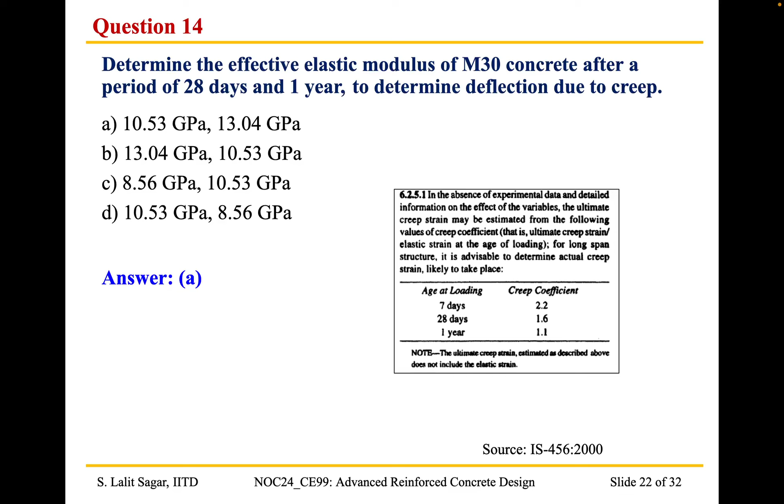For different ages of concrete, we have different creep coefficients: for 7 days it is 2.2, for 28 days it is 1.6, and for 1 year it is 1.1. First we have to determine the value of modulus of elasticity. Let me quickly do that for you.

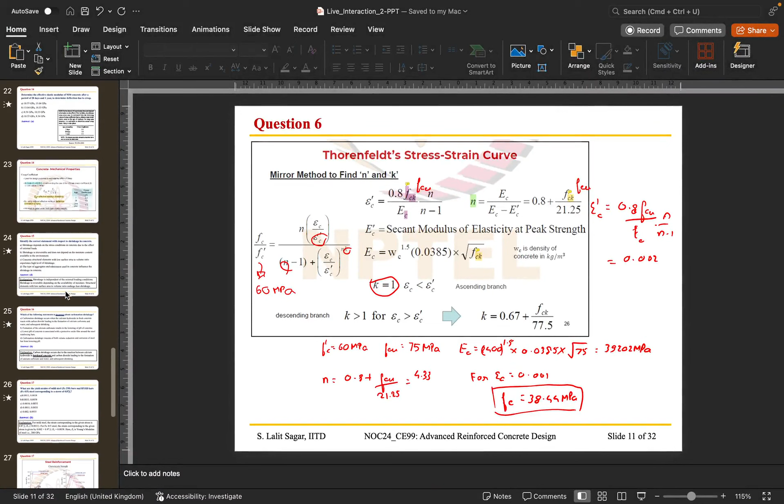We have the modulus of elasticity as EC equals 5000 root FCK. To find the effective modulus of elasticity, it's quite simple: use the value of EC, then 1 plus 1.6 for 28 days strength, and for 1 year replace the value of 1.6 by 1.1. I think we can move forward.

Moving forward, identify the correct statement with respect to shrinkage in concrete.

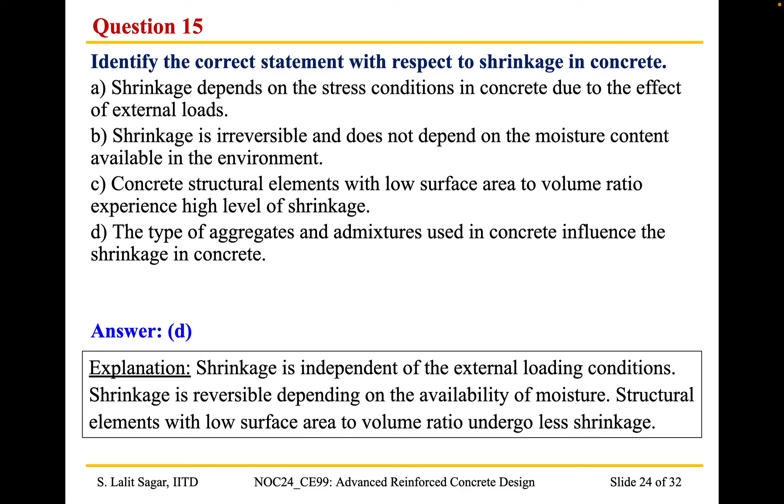So the correct answer is, as the two participants pointed out, option D. According to option A, shrinkage is independent of the external stress conditions in concrete, and shrinkage is reversible and depends on the moisture content available in the environment. Then concrete structural elements with low surface area to volume ratio experience low levels of shrinkage. Option D is the right statement, because the types of aggregates and admixtures used in concrete influence the shrinkage within the concrete.

Moving forward, which of the following statements is incorrect about carbonation shrinkage? So we have to identify the incorrect statement.

Okay, option C. So can you volunteer and tell what should be the correct statement in option C? What should be the correction? Option C is the correct answer. I think all are correct, sir. The high pH, I think. Yeah, exactly, exactly.

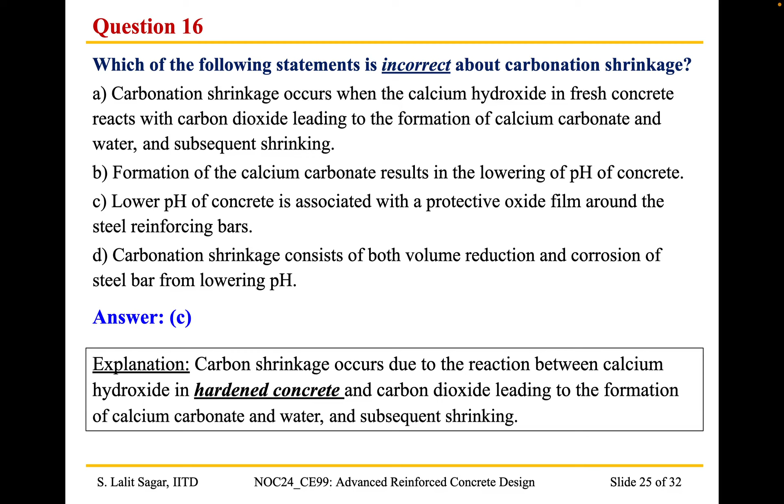Okay, so we had solved a similar problem last week also. What are the yield strains of mild steel bars and HYSD bars? The yield strain we are determining corresponds to a stress of 0.87 Fy. So you can take 2 minutes.

I hope some of you are trying.

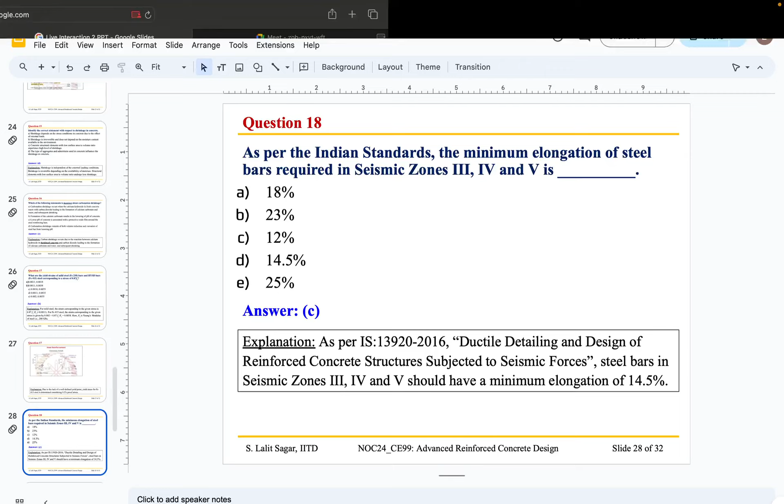It is factual, it is taken directly from the lecture slides. Okay, so the correct answer is C. Oh, I'm sorry, I think there is a mistake. It has to be option D, it is 14.5%. So as per IS 13920, steel bars in seismic zones 3, 4 and 5 have to have a minimum elongation of 14.5%. Okay, moving forward.

Okay, so based on the decreasing value of modulus of elasticity, arrange the following rebars. We have the pre-stressing steel, the carbon FRP, the steel reinforcing steel, the glass FRP, and finally the aramid FRP.

Anybody would like to volunteer? Option D. Okay, thank you for your response. Anybody else would like to answer? Option B. Okay, so we are looking at the decreasing value of the modulus of elasticity.

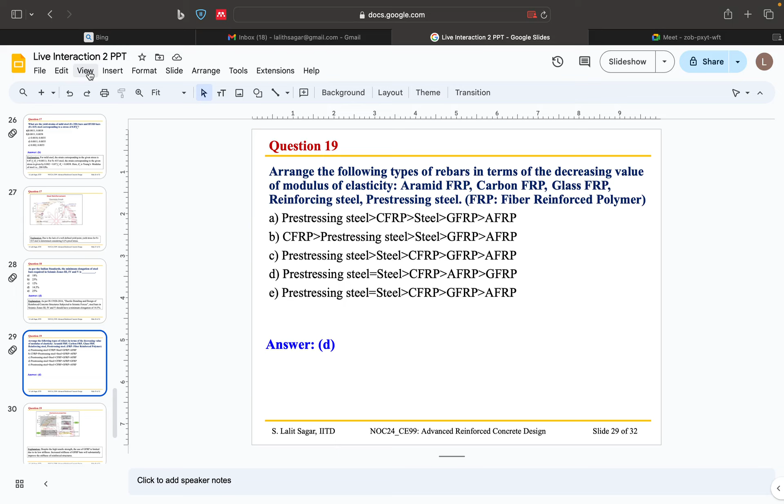Where can you kindly share the modulus source? Modulus of elasticity is the same, sir, for both. What is the source? Can you kindly share that? Earlier I was saying, where I don't know actually. I think, actually I remember for pre-stressing steel it is 190, whereas for steel it is 200. Okay, so that's what I remember. You can check that once again, sir. But I think, okay, for steel we consider it as the same. So even in this particular case too.

Okay, thank you. Moving to the last question. If it is given different, then we have to select pre-stressing steel, this one, huh? If it is not given, and it is not equal to, then what do we have to do? No, it is generally equal to, because all types of steel — this is one theoretical question — does, when you change the grade of steel, the modulus of elasticity changes or not? So we consider it to be constant for all practical purposes.